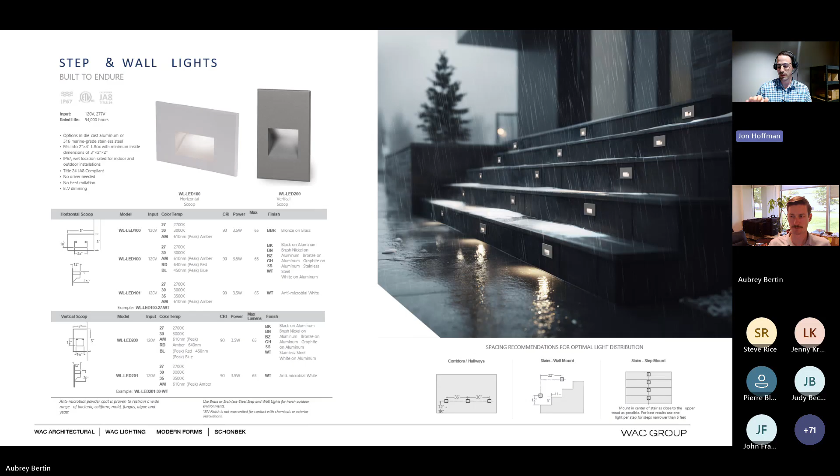So not only do you get the aesthetically pleasing features of this, you also have guidance right in the catalog in the bottom right corner of this image or on the spec sheets if you're looking for guidance on where to install them and what positions to get the best aesthetics and illumination. You can do it in vertical. You can show on step lights or into steps.

But the real new magic here are the upgrades that we did this year. And if you look on the slide, you can see here is a brand new revamped light engine in an endurance robust design. What we did is we went back to the drawing board and we made a light engine that is fully completely sealed and thermally optimized.

It is rated to IP67, and for those of you that haven't memorized all the nomenclature, IP means ingress protection. 67 essentially means that module is fully sealed from the factory, and these step lights can handle submersion. Now, we don't expect a lot of step lights to be submerged, but they're actually over-engineered and built.

These are the only step lights in the marketplace that are IP67 rated, so that if you do have moisture or condensation, these are going to hold up to it, or if flooding does occur, it's going to take it. You might have other parts of your house or your residence or your building that you have to fix, but these step lights won't be one of them.

An additional feature is others in the marketplace without a sealed light engine require caulking around the junction box to have these be robust. Here, we're not relying on the contractor to do perfect caulking, with any callbacks or warranty issues, because even if you don't get it perfect or it cracks over time, the engine itself inherently can handle moisture with its IP67 rating. So even if you don't get that contact to the junction box, the step light will be able to handle it and endure.

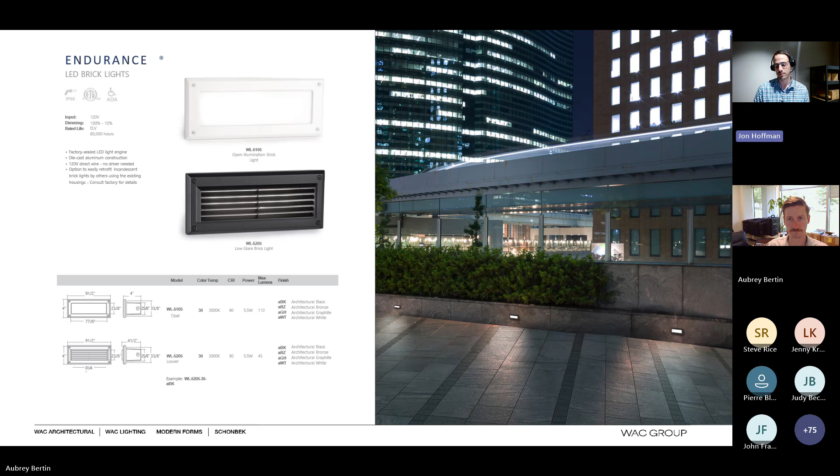Great thing about these, they give you a larger scale residentially and commercially, but they also can be retrofitted into existing halogen or incandescent step lights that already exist. You don't have to replace the entire box that might be in place. You can use the LED Endurance step lights, brick lights, and upgrade the existing infrastructure quite easily without starting from scratch. Well said.

So moving on to a different layer of lighting, away from path lighting up to higher tiers of outdoor. This is the Endurance LED floodlight. Floodlights of this nature are great for general viewing in paths and areas outside. Also great for security purposes. True to the Endurance line, these are die-cast construction. This one actually has a breathable waterproof technology that's factory sealed to hold up over the elements over time.

It's 120 volt direct wire, so no external driver needed, easy to install. It comes with 2 canopy plates, so though it's square in aperture, it comes with a round or square canopy mounting, and you can install it vertically on soffits or it can be ceiling mounted as well, so it's quite flexible. Comes in a variety of color temperatures and outputs.

And I can attest, I have this unit installed in my home, and you can see there's options that are over 2,000 lumens and one that's nearly 3,500 lumens. It does a great job of illuminating spaces, and you have choices of which one you want in terms of power outputs here.

Additionally, you see there's screws there that are removable on the canopy plate. That is there so that you can put one of the 3 accessories on the bottom, for wayfinding at night or a security light. Motion sensors are quite important. Also, photocells give you automation for energy savings. And then there's a brand new unit of a motion sensor plus a photocell on a smaller scale that we just released this year to complement this product line and the Endurance wall packs.

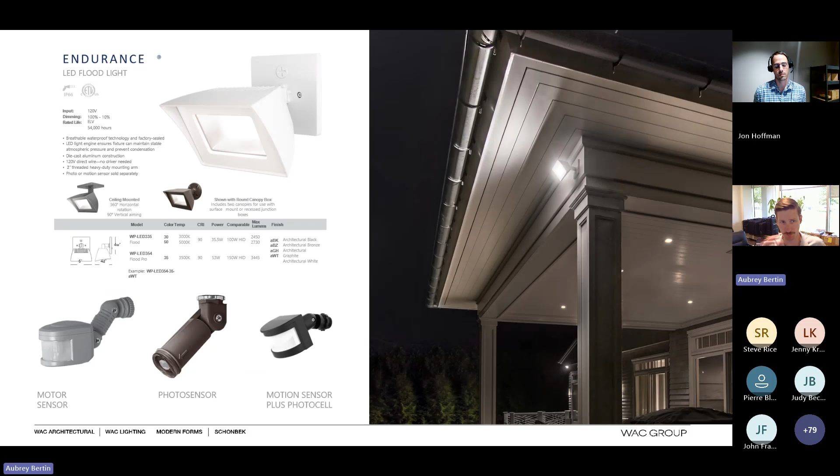Moving on to a more cylindrical traditional form factor, we have our Endurance single and double spotlights. Essentially the same power light engine, but you can get it in a 2-light or a 1-light version. Again, it can feature those accessories at the bottom. Roughly 1,000 lumens of light. You're getting a really good aesthetic and robust design here. You're getting glare control as well. You can see the shielding on the neck here where the light engine is set back.

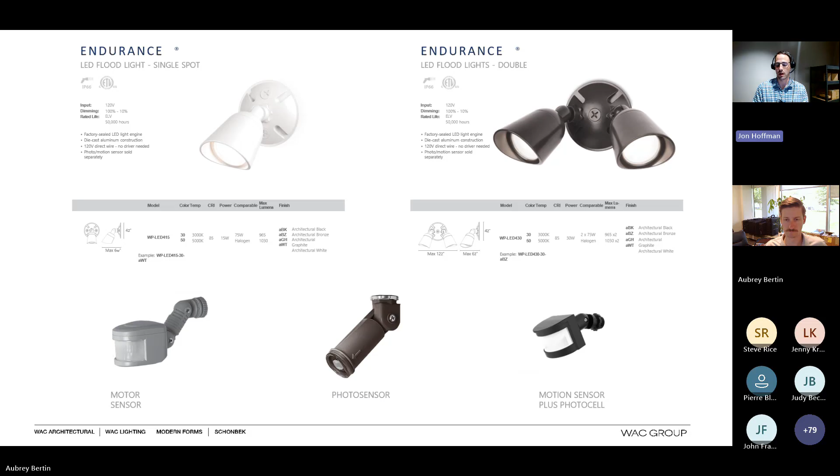It's a nice unit. If you hold this in your hand, it's very durable, and the driver is actually built into the heads, so there's no driver going to the junction box and no remote driver needed. This is going to be a very quality, robust option with high lumen outputs in various finish options and a really nice aesthetic. There will be a more budget-friendly option for budget-sensitive projects that Aubrey is going to present later on, but this is the one in our Endurance portfolio, and it's very well received.

If you're looking for wall packs that are more streamlined against the wall, we have 3 offerings of wall packs. Our first one here is our Endurance Fin. Our Endurance Fin is low profile, and you can see it's actually ADA compliant. So that low profile close to the wall gets you ADA compliant. It's also dark sky listed. It features a tempered prismatic lens for safety and durability, but also kicks the light distribution out and reduces glare.

If you're looking for something that projects a little bit more away from the wall, or you can orient at various angles, that is the Hawk fixture. The Hawk fixture is over 2,000 lumens of light, a sleek aesthetic, again, die-cast aluminum, integral driver.

A neat thing about the Hawk fixture is if you're doing construction where you have exposed junction boxes that aren't recessed, there's a lot of brick construction where you have conduit exposed on the wall. You can't always get a recessed junction box in. This comes with a junction box sleeve in the box that can easily adapt, and you don't have to recess any junction boxes in. You'll get that included, and it also works with all the accessories, motion sensors, photocells, and the new combined unit available to accessorize these units.

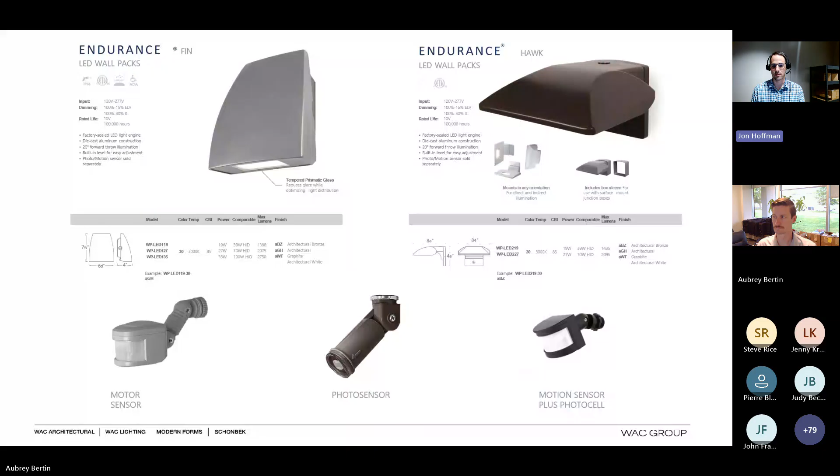And then finally on the Endurance collection, we have a signage light. This Endurance signage light is an adjustable beam signage light. It's available either in a 2-head or a 1-head, can be extended away from the wall. It's adjustable in orientation and tilt, but it's also adjustable in a patented beam angle adjustment. So the front heads can be adjusted from 15 to 60 degrees.

If you know our landscape lights or WAC Group track lights, you can see this is a great feature. You're not exactly sure how big the sign you are lighting is beforehand. This unit can adjust to that, and it can adjust as the field changes over time. So a very flexible unit, great for lighting signs, both indoor or outdoor as well.

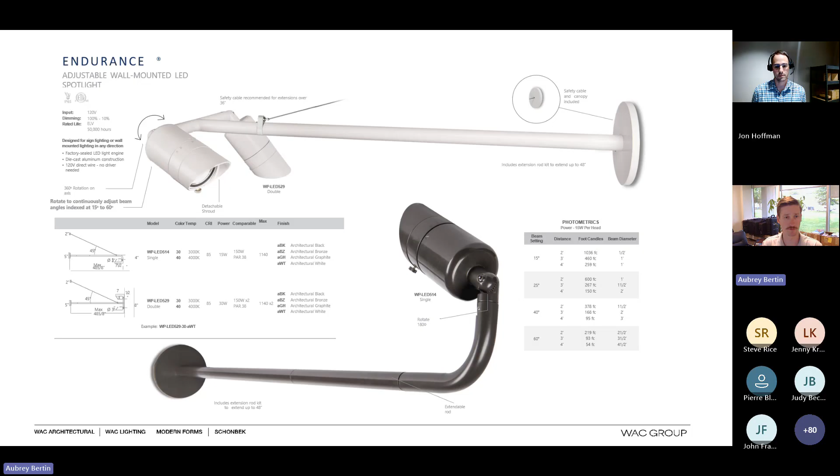Just want to point out a couple more things on this. In addition to the beam angles adjusting from 15 to 60 degrees, we also point out photometrics and line drawing, so you know exactly how this is going to mount inside of your space. And we do that for a considerable number of our fixtures throughout. It makes it really, really easy to plug in.

The finish on this is this fantastic UV stabilized, textured, whether it's bronze, graphite, white, black, tons of different options in terms of finishing, but just a really quality construction. You can feel the weight of this fixture and understand what you're paying for. This is also universal voltage, die-cast construction, plenty of lumen output, and it's been in the line for many years because it's a great success.

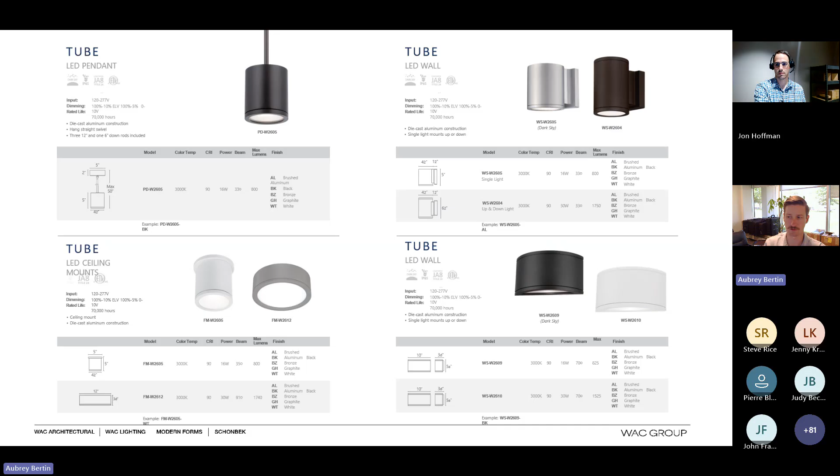Now, if you're looking for a more cost-effective solution, we also offer cylinders and what we call cubics, which is the rectangular version here, that are 5 CCT selectable and still give you 800, or 1750 if you're talking about an up and down light version as well. We previously did this model with thumb screws, and we're able to reduce the amount of visible hardware, so you still get a sleek look even out of a budget-friendly option here on the cubics and cylinder.

Expanding upon that cylinder family. And John alluded to the Endurance version of this fixture, which had that kind of premium shielding. This also is a great option if you're just looking for a single or double light mount. You will note that this does not have an accessory port to mount your photo sensor, motion sensor, or dual photo and motion sensor. But still a fantastic amount of lumens. We're talking about 1400 lumens, and that's because you're pressing the LED more to the face of this module.

So your trade-off is lumen output versus shielding, when you get to that other endurance fixture. But still a nice look, reliable, does quite well.

You've also got your lantern, and I'll go through a couple of decorative elements here kind of fast because we're short on time, but these are 5 CCT selectable options. They're die-cast aluminum in terms of the frames. Instead of glass, we're using an acrylic here, so it's incredibly durable. It's all UV treated, so it's not going to yellow when the sunlight hits it. These all stand with our 5-year warranty for exterior product.

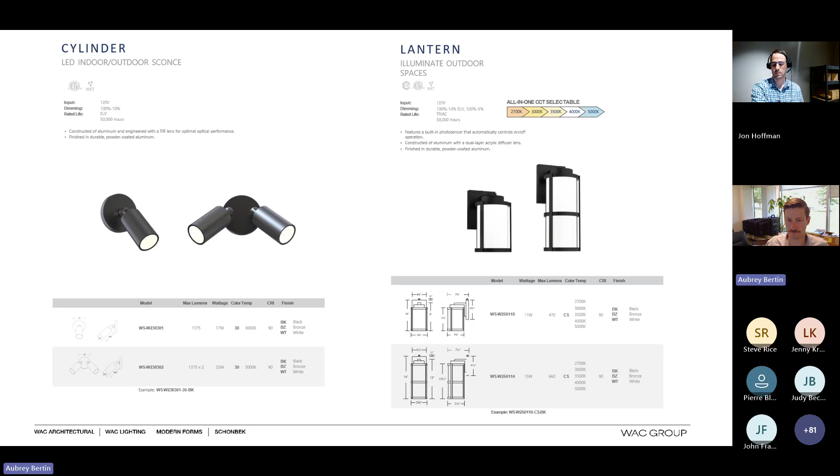And again, in different sizes, so you can match your front door, maybe as a grander entrance than maybe a side door. And so you might go with a smaller version on the side door. It's important to have that family and array of options to complete a residential opportunity.

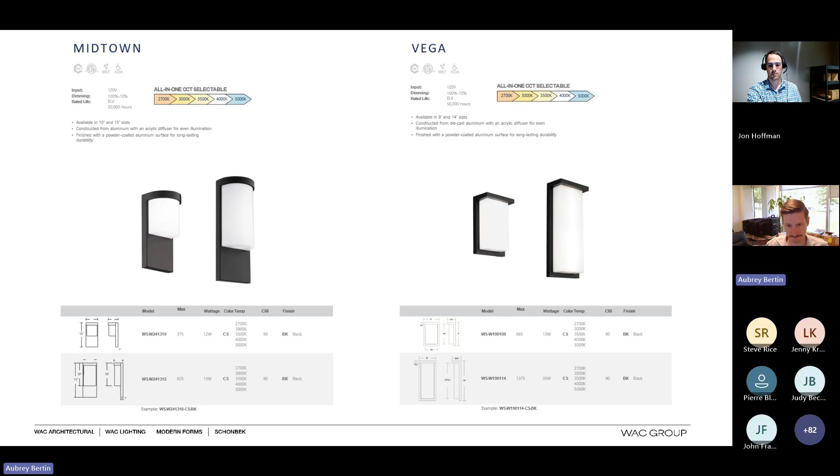Midtown, again, gives you some more die-cast aluminum with acrylic face decorative options. This one comes in 10-inch or 15-inch sizes. And same here, this is going to be an 8-inch or a 14-inch size for the rectangular. Very, very popular items that you're getting from the outdoor decorative.

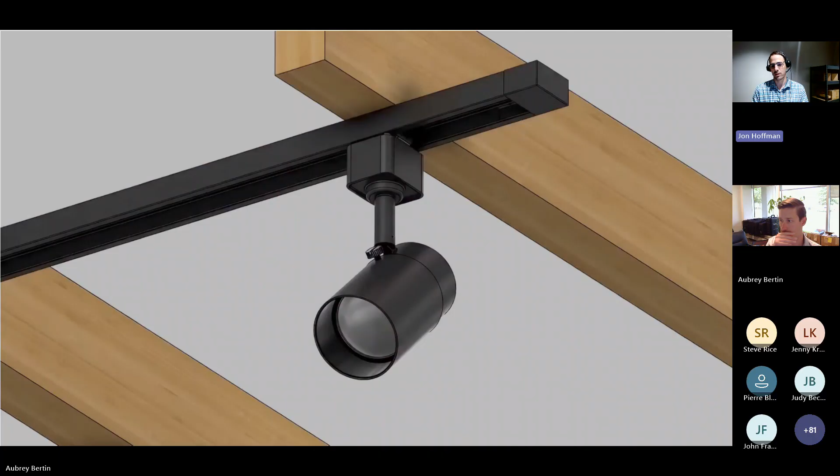The 4 main components: the first is the track. You install it first. It's aluminum. And the second piece you're going to see installed here is an outdoor rated cable, direct burial. That's going to electrify your setup, and then you put on the head. The head toollessly installs onto that direct burial cable.

It's not direct burial in this case, but it's outdoor rated. So that's where you're getting your outdoor nature. And these are how you make the contact. There are self-piercing pins that, as you rotate it on, go into the copper. And the wire has self-healing properties, so it will actually seal up and you can move the head around. Then once installed, the head is aimable, 360 degrees,

and it is also beam adjustable using that patented beam adjustable. Then the fourth component is your transformer. It's a low voltage landscape transformer. You turn it on and then you get the outdoor nature. You can see it in residential and pergolas, and it can do residential or hospitality commercial alike. So this is a brand new category from WAC Lighting, outdoor track. It brings the flexibility of indoor track to the outside, built for the ruggedness, built well.

And all of this can be boiled down. It's quite a simple system to use, on one catalog page. You can see it here. I went through this quickly, but you can see your four main components here, and you can do patterns as well. There is another webinar series where we went into this outdoor track in more detail. Here we only have a few minutes left. That's what we're going to get today.